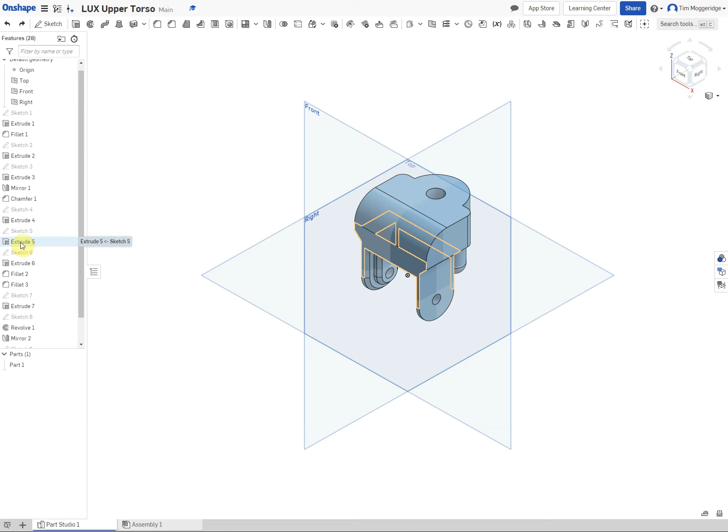So we are going to edit this part so that it will fit the assembly properly. The first thing we're going to do is identify the area that we need to change, and it's actually extrude 5. So if I right click on extrude 5, I can edit sketch 5, right click to view normal to the sketch work plane, and just scroll with the mouse to take us in so that we can edit the sketch.

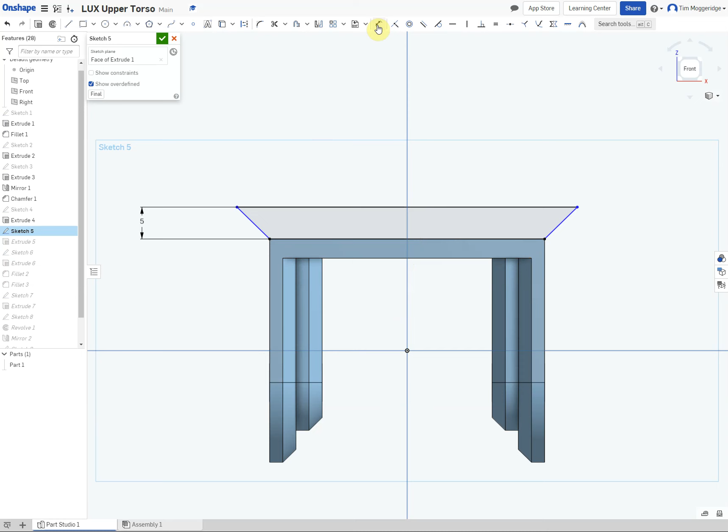Now we want to keep this height of 5mm, but this line needs to be longer, which is going to mess around with our angles. So the first thing we're going to do is delete the two 45-degree angles by selecting them and pressing the delete key.

Now I'm going to use the dimension tool, and you should see that this is 52mm long and it wants to be 55mm long. I'm going to change that to 55, and you can see now that it's changed the length of the line and that angle.

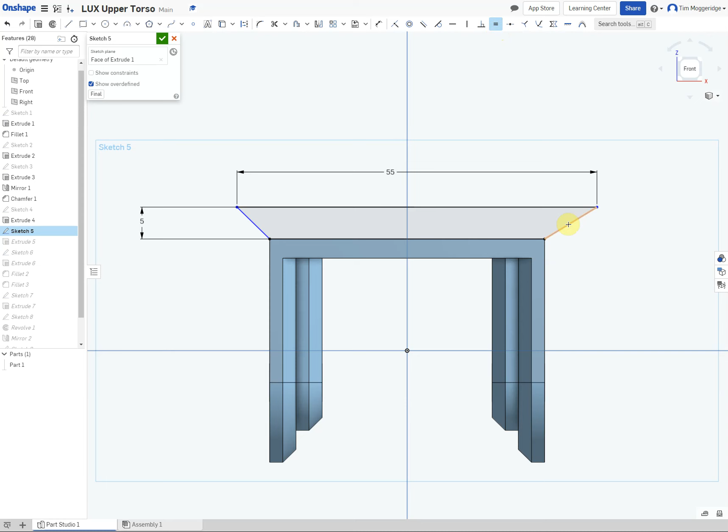We want this to still be symmetrical. So what we're going to do is use the equal constraint and apply that to this line and this line, so they are now both the same length. We've centered up the line and we are happy. So click on tick and it will update.

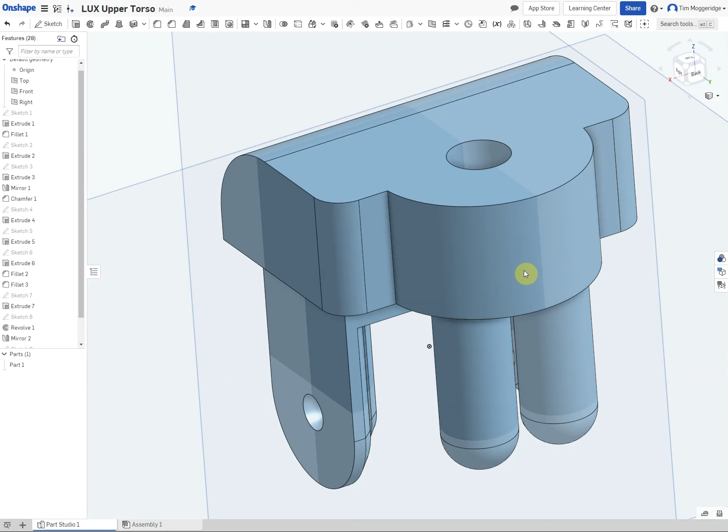And because of the way we drew the other parts, based around centers and work planes, it hasn't affected anything else. It's just made this top part a little bit wider.

So the final thing we need to do is insert these holes. Let's right click and select new sketch, right click, view normal to the sketch plane, use the circle tool, and we want to line it up with the center of this radius. It might let us do it, it might not, sometimes it will. There we go, because we've hovered over those two.

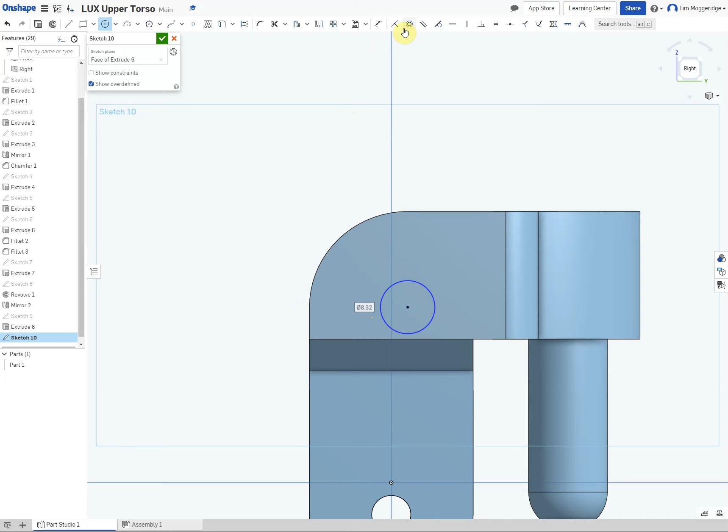So we're going to draw out our circle and dimension that to 6mm. And if we could have just drawn the circle there and dimensioned it 15 in and 15 down.

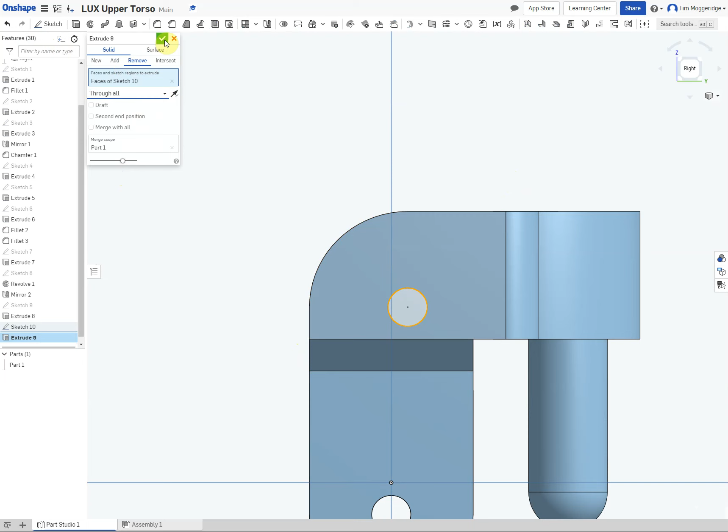And then the feature that we want is going to be a remove, and we want to go through all. Click the tick, spin it around as well. We can see it goes all the way through. We can spin it around to look at our hole. And so that's our part updated.

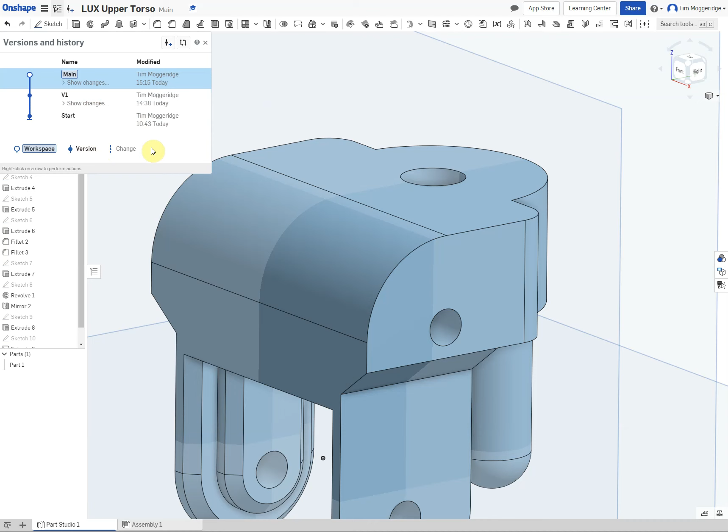Now what we might want to do is just look in and manage the version. We can see that version 1, we're still in. We could change the version, we could go to a different version, but we're going to keep it at that, and then if we've already put it in the assembly.